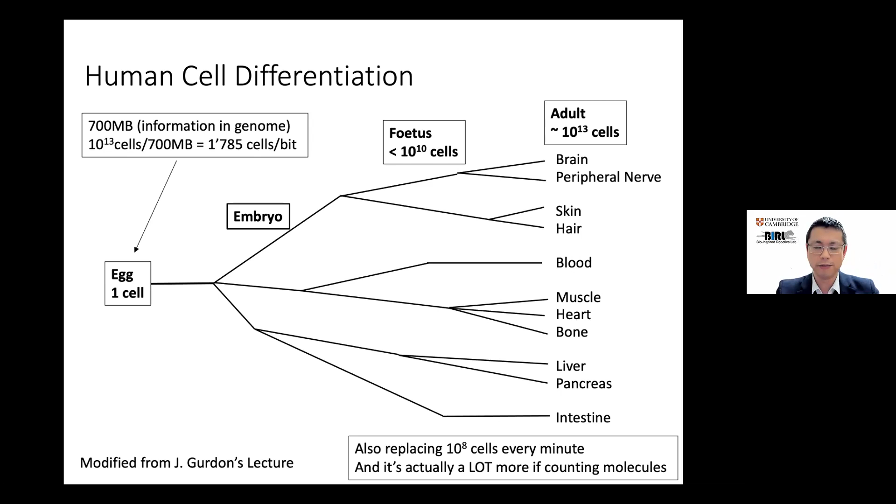Most of our robots are actually very complex. We have thousands of parts and components to make one single humanoid or other complex robot. So those are often more complex than biological features, and they can do quite a lot of things compared to little babies that are totally incapable of doing anything until they grow up for a couple of years.

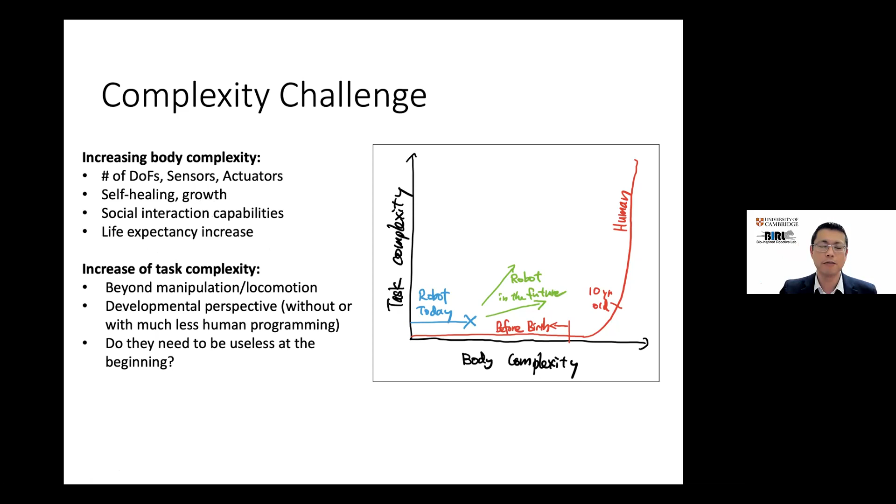Both of these, the challenge of body complexity and task complexity, we need to think about in the long run. So what do we learn from biological self-organization? If you look at how we ourselves start with one cell to become adult, compared to our robots today, the scalability and complexity is really, really different.

If we want to reach the level of biological systems, we cannot build robots by hand. We cannot design piece by piece and assemble piece by piece; we need some sort of automated self-organization process so that the robots can actually assemble themselves and grow themselves. And also the growth has to come with precision and robustness, because this is a really scalable system—we need to think about 10 to the 13 scales of growth rather than just a couple of times bigger.

Diversity is another thing. Morphological dynamics and mechanical diversity is incredible—we have sensors, motors, computers, energy sources, all of these things that have to be implemented at the material level rather than as artificial components. That's something we need to think about.

Moreover, the environment plays an important role. It's not just the systems we have to build, but we need to think about how the system grows, the environment in which the system grows. That's key information, a key component of the growth process—the environment is part of the program for how we grow and learn things. That's what we learn from nature.

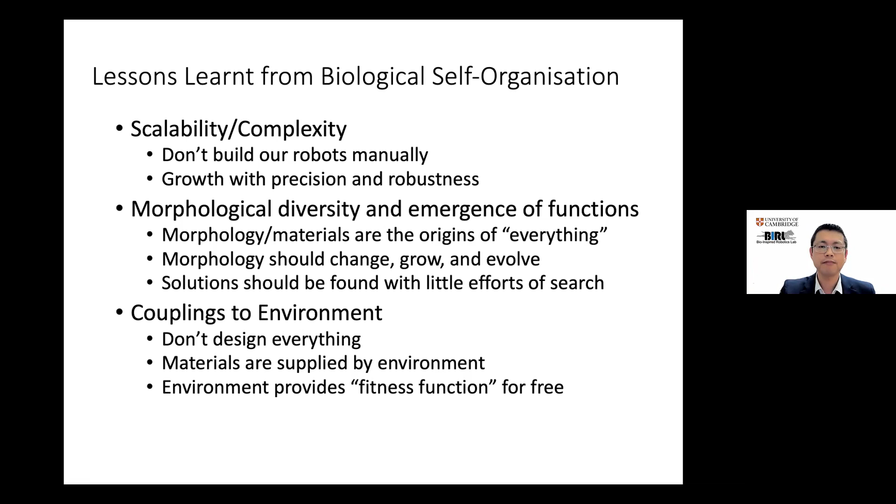Okay, so let's look at how biology actually works. One of the topics we're really interested in is how our body actually grows inside our mother's womb.

Especially at the early stage of our life, the brain and the body are completely different structures, completely different architecture. But then they have to grow together so that they can work together hand in hand. That's the process we usually don't understand as engineers or robotics designers. We usually build body and brain separately and try to put them together afterwards, but that's not actually the case in the biological system.

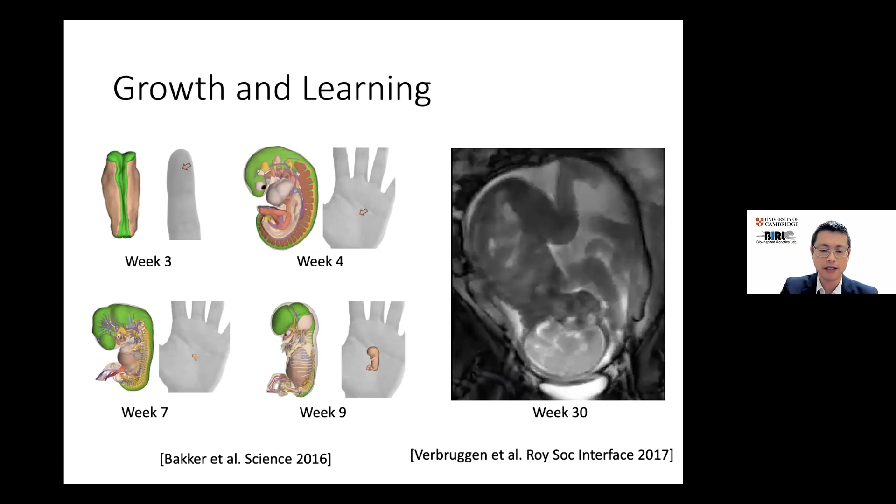One of the first problems we worked on is the problem of so-called reflex behaviors in human motor control. If you look at our body, the motion is triggered by muscle activities. But muscle activities are usually not directly triggered by our central brain — most of the signals are actually coming from our backbone, the spinal cord.

The spinal cord has many neural circuits, and there's a lot of close communication between muscles and spinal cord. Usually biologists or neuroscientists treat this spinal cord neural circuitry as hardwired circuits, because you cannot really control, change, or learn this, especially when you grow older.

But actually this has to also grow when we're really young, especially before birth. So what we're interested in is how we can think of this kind of spinal circuit growth during our developmental process, especially before birth. This is particularly important because most of our daily behavior primitives — such as myotatic reflex, reciprocal inhibition, or withdrawal reflex — all these basic circuits are already there when we're born.

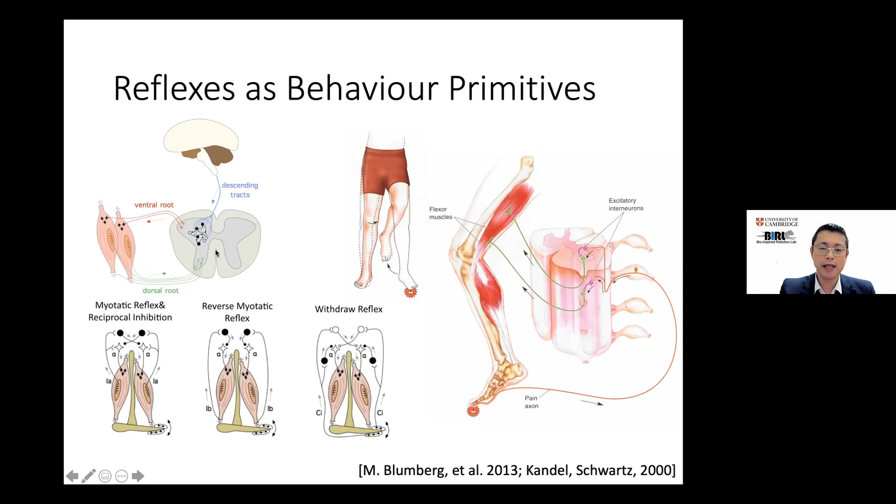We were lucky to work with Mark Blumberg from the University of Iowa in the United States, an expert in spinal cord reflexes. We worked together on how we can prove the hypothesis called the muscle twitches hypothesis.

The problem we're looking at is how muscle activity is related to the activity of lots of neurons. From the central brain's point of view, we don't really know which neurons are connected to which muscles, and we can actually do a lot of different kinds of control through the fully connected neural network, but somehow we need to figure out this connection.

Our hypothesis here is about how muscle twitches play a role. When we're sleeping, or even awake, our muscles are randomly activated from time to time, and these twitch activities are more active during sleeping or before birth. Even the fetus before birth shows this behavior of muscle twitches, and we're trying to figure out whether this kind of muscle twitching plays a role in developing early-stage motor control.

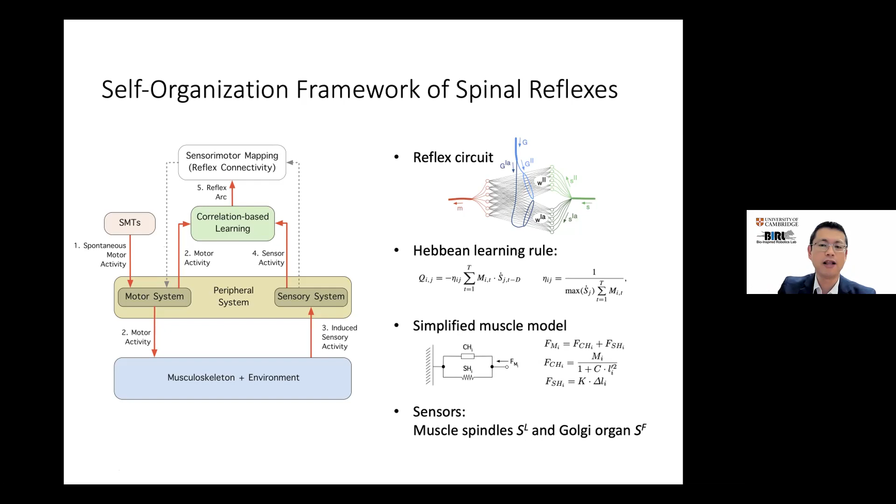And obviously, the most important thing is the spontaneous motor activity. So this is a muscle twitch model that we feed into the motor system and see how the correlation-based learning can pick up some relationship between sensory information and motor information. In this way, we can actually do a systematic understanding of how sensor motor coordination as well as muscle twitches are related to each other.

So what we did is a very simple system. We think of the simplest robot ever, right? We can think of a single arm connected to one pin joint. This pendulum can go right and left in a passive way. But then we think of a simple motor as a muscle.

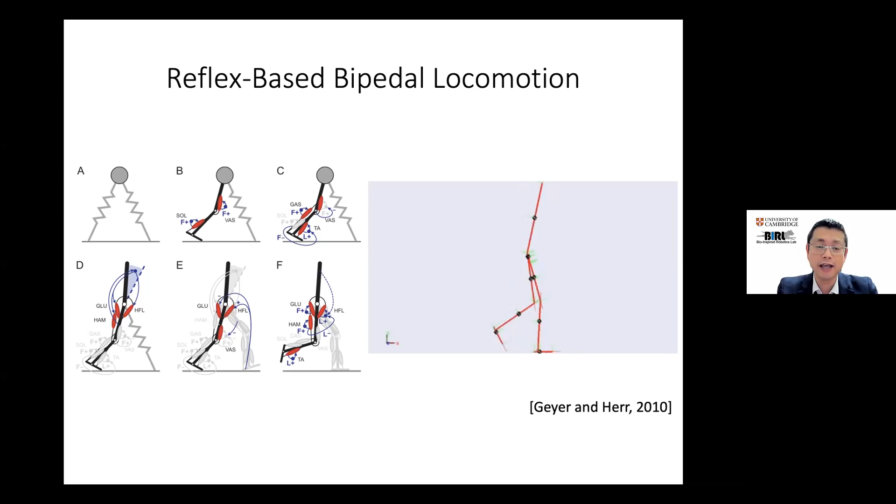And this is something we can start investigating because of this computational capacity in neural networks and so on and so forth.

Okay, so far so good. We talked about the simulation of complex motion control, sensorimotor control. But that's kind of the starting point of our research - how we can deal with the complexity of motor control at the spinal cord level.

But if we work on the mechanical part of it, the mechanical growth is a real challenge from bio-inspired robotics. So we've also been looking at how we can make our mechanical design of robots more dynamic. We need to think of some sort of mechanical growth or mechanical evolution of our robotic system.

That's why we started thinking about the concept of a robot genome. The robot genome is basically a sequence of information that can be translated into physical robots through the phenotyping process. Once we have a robot, we need some sort of selection or reproduction process so that we can update the genome for the dynamic evolution of the body.

So this kind of loop is a real holy grail, so to speak, for bio-inspired robotics, and that's what we've been thinking about - how we can actually do such a thing.

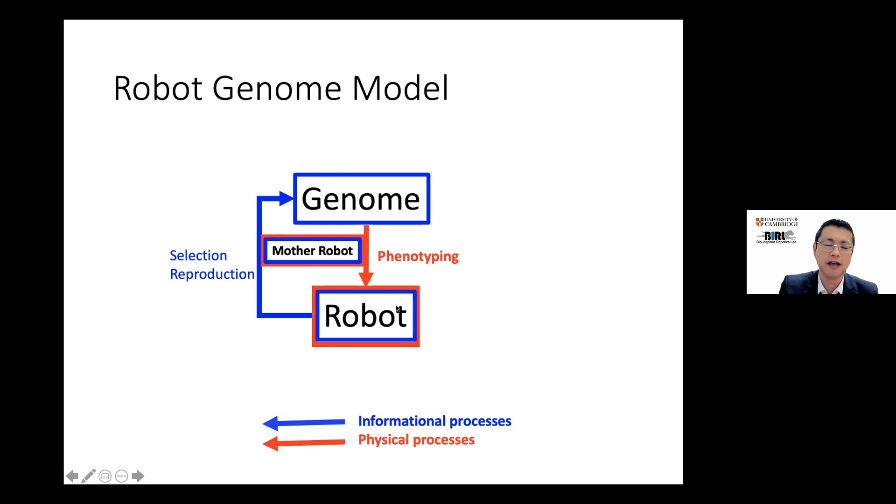So a significant amount of time of our research has been invested to build the mother, or what we call the mother robot. The mother robot is a robot system that can actually interface between the information world and the physical robots. And that's what I want to introduce you to in the next few minutes.

The breakthrough of this mother robot research was really about what kind of materials are available. We are really lucky that we found this interesting material, the hot melt adhesive - this is nothing more than hot glue. I think you have it in your home, you can buy it in any DIY shop. But this material is incredible in the sense that it's very well engineered. We can control the material properties - the Young's modulus, the softness, rigidity - very well, depending on the temperature. And we can also control the adhesiveness and so on.

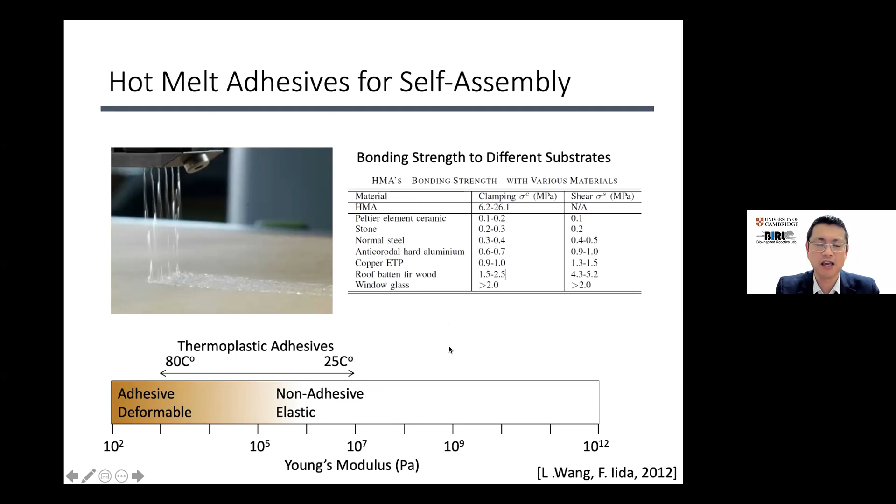We can actually glue almost any materials, from stone to plastic to metals and so on, as long as it's not wet.

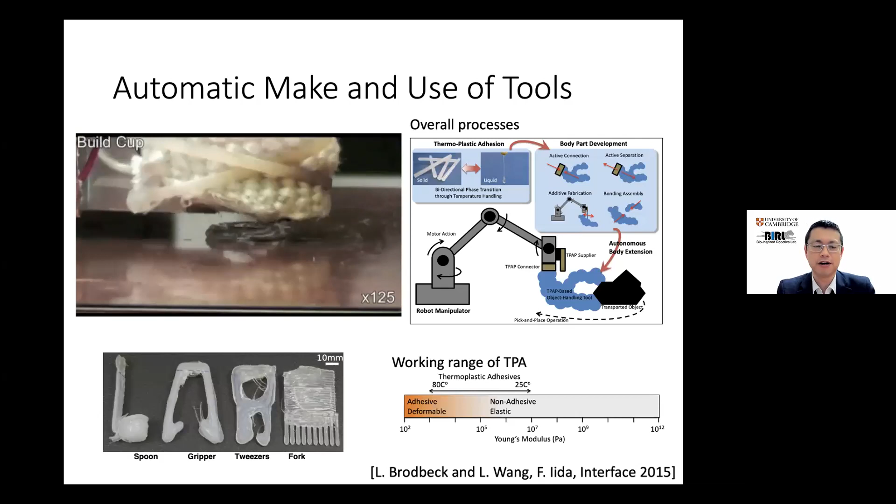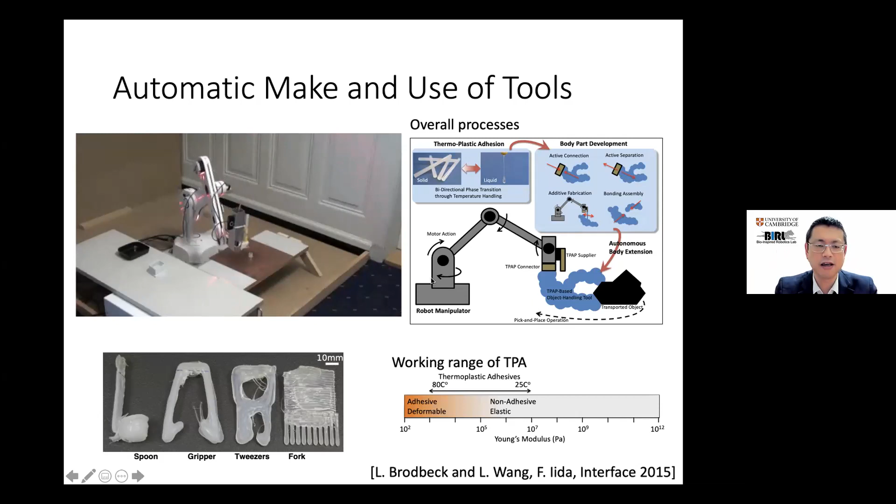This is an interesting material that we started thinking about for mother robot research. The first thing we did was 3D printing with this material. This is the hot glue, hot melt adhesive, put in a specialized end effector robot manipulator. This robot is able to do 3D printing of structures.

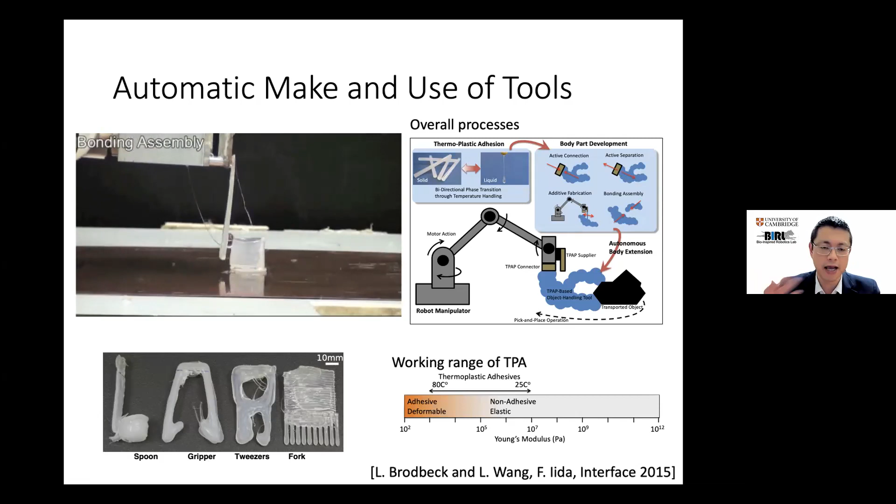It's not only 3D printed, but you can use this material as a glue. So 3D printed structures can be put together into complex mechanical structures by gluing them. This robot can do construction of many different kinds of structures by 3D printing and gluing.

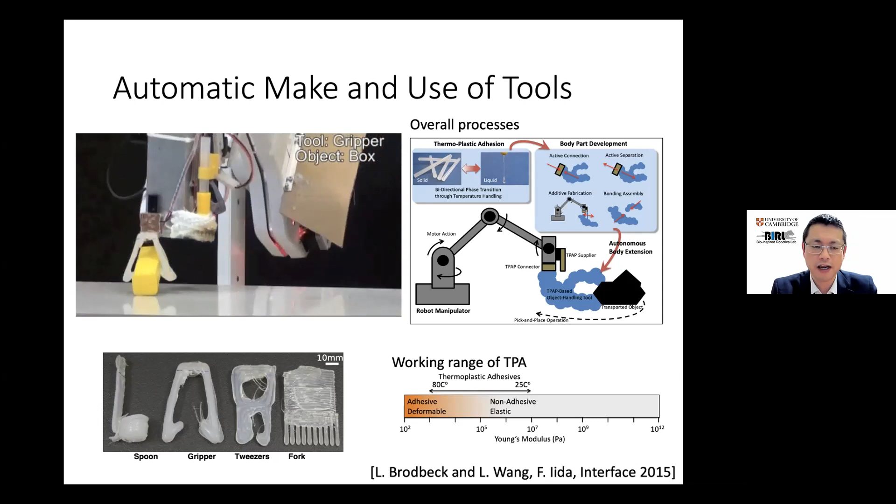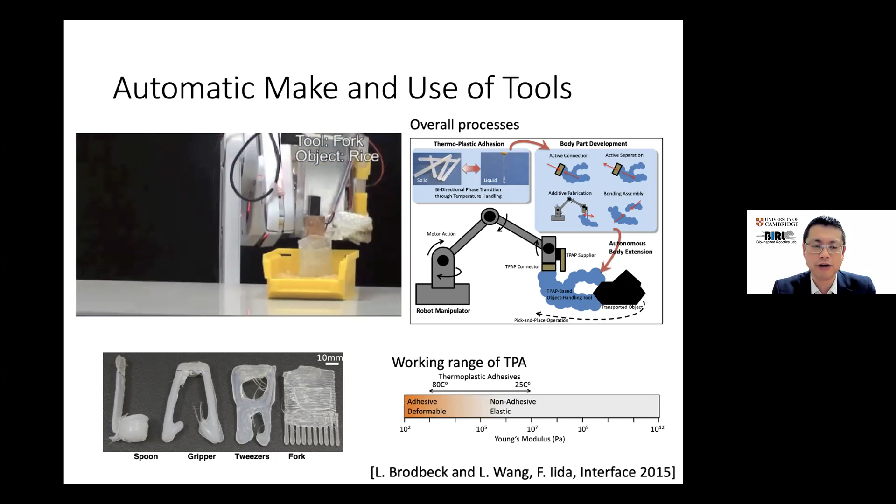This is a demonstration that the robot can automatically change its own end effector for different kinds of tasks, such as scooping water, picking up pebbles, picking up a large object, and so on. This demonstrates how hot melt adhesive material can be used for dynamic change of the mechanical structure of robots.

That's the starting point of our research. This is the first demonstration we did. But of course, the design of this end effector was given by human beings. Even though the building process and exchange process of mechanical components are done automatically, the design itself was given by humans.

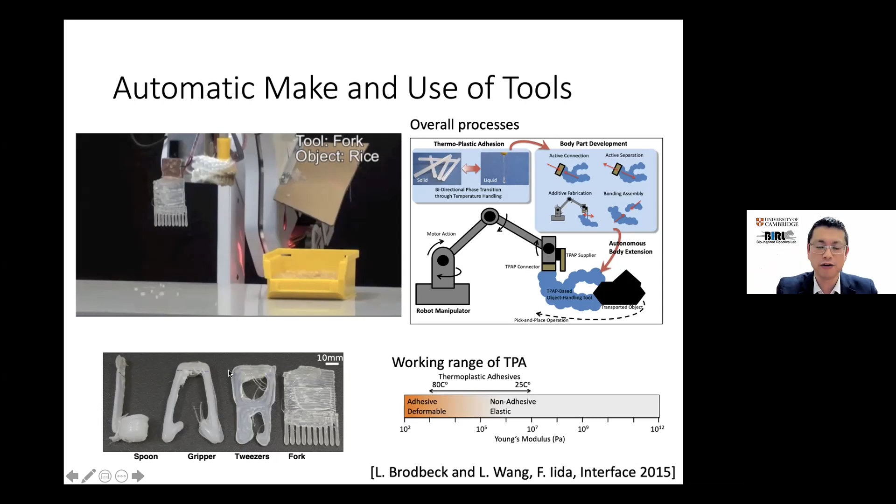So the next challenge is how the robot can design its own body automatically, without human intervention. That's the idea of physical robot evolution using a mother robot.

This is the next version of mother robots, which has the glue end effector but also a gripper that can pick and place different components. This robot is able to assemble a large diversity of structures by assembling a few components and gluing them together.

In this case, the mother robot is making a small child robot. This mother robot can make different kinds of child robots so you can explore the design space in a trial and error manner. Here, the challenge is how we can define the genome.

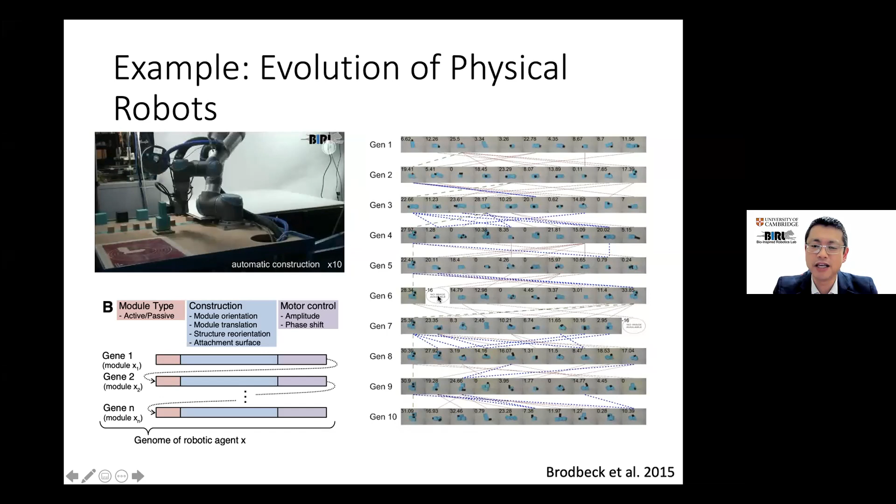That's a very good point. So if you look at all these pictures, there's some missing picture over here, for example. This is the failure of the building process. Some processes are more difficult to build than others, and in that case it's likely to fail. So this kind of failure of building process should be negatively reinforced, and therefore this robot is automatically kicked out from the evolutionary process.

Yeah, thank you so much. Yeah, this is really, really cool. Thank you. Thank you. Right. So this is really exciting research.

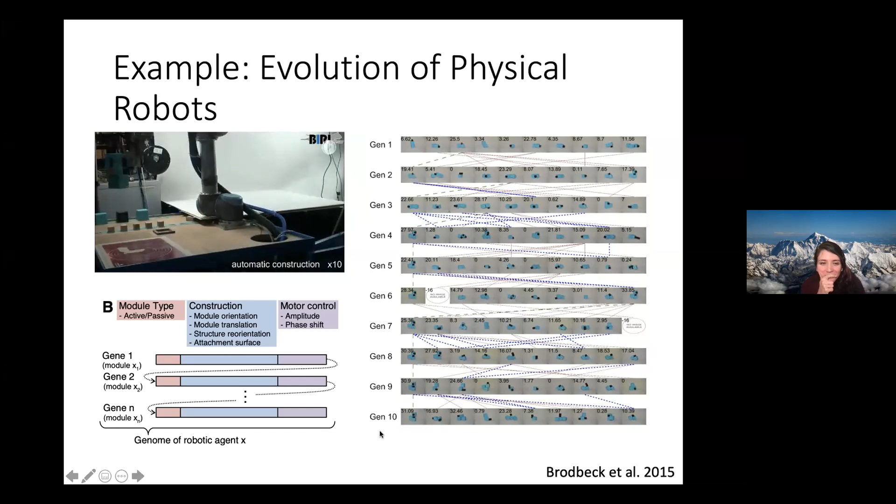One of the most exciting things is what kind of things come out from the evolution process. These are some of the coolest robots we found from evolutionary search. Sometimes we have very small robots like this - smaller robots are easier to build and unlikely to fail, so there are lots of robots like this in evolution. But on the other hand, bigger robots are more difficult to build, but can move faster and over longer distances. So this is the trade-off between small robots versus large robots.

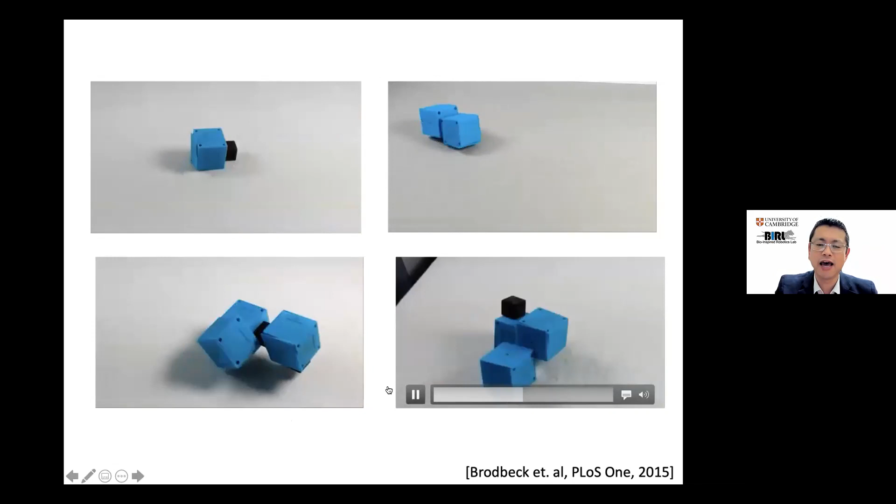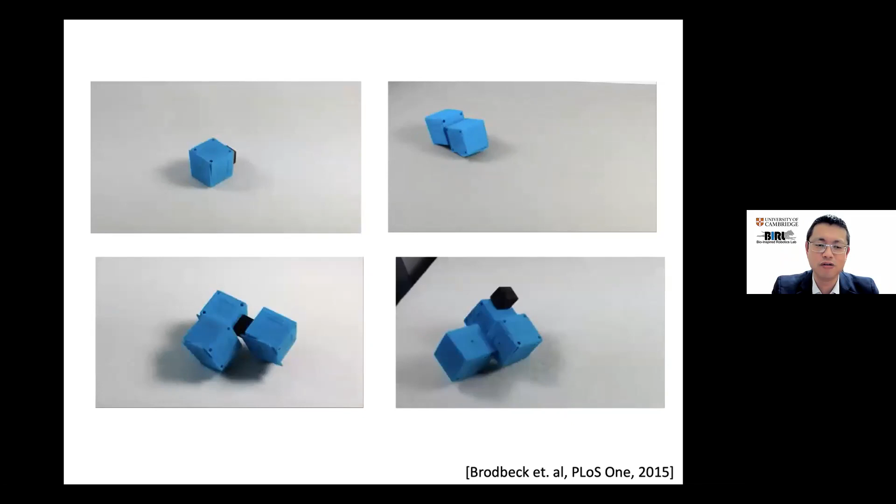And all of these kinds of things can be automatically generated by the evolutionary process. The human is not involved in the design process, and that's why it's really interesting. All we need to do is provide these cubes and the genetic structure, but then everything else is automated.

The largest experiment we did involved 500 robots automatically generated over 4 weeks. Two students were running this day and night. The only thing not really automated is the cleanup of failure cases - when the mother robot fails to build, a human has to help disassemble or clean up the mess, and that has to be done manually. But otherwise everything else is automated. This is kind of an automated research project.

We usually observe some form of fitness increase because this is selection of the fittest. This is kind of an obvious result, but sometimes there's a higher rate of improvement, other times it doesn't change much - but you usually see some steady increase of the fitness function. But the most interesting thing from this experiment is that some of the outcome behaviors are very unpredictable and difficult for humans to design.

Most of the robots actually show periodic behavior like this. We have some shuffle behavior, very periodic, one step after another. This one is rotating around but still moving forward. So this is all kind of periodic.

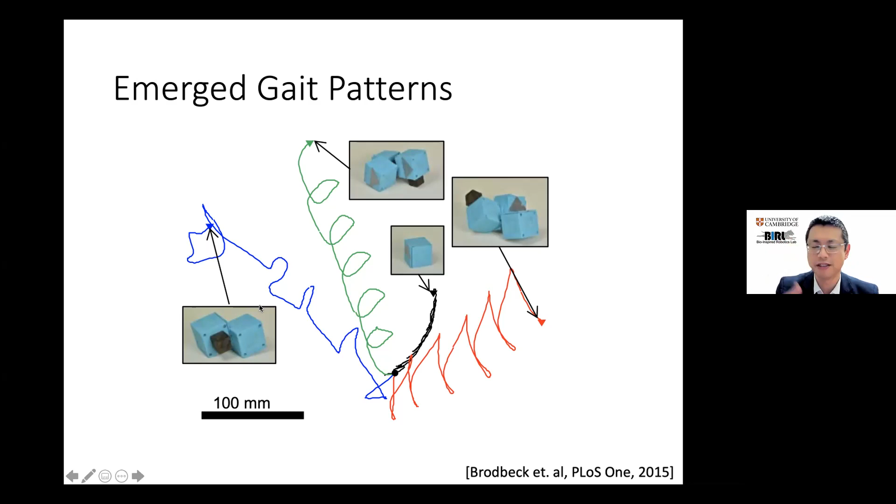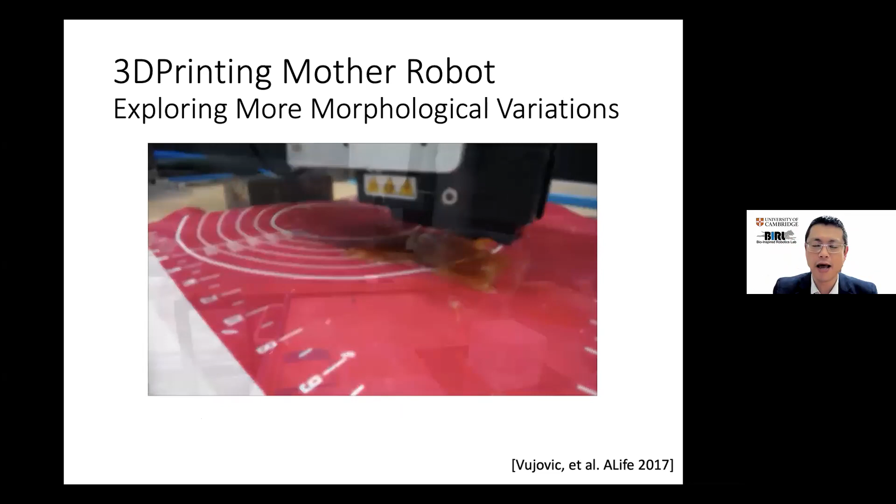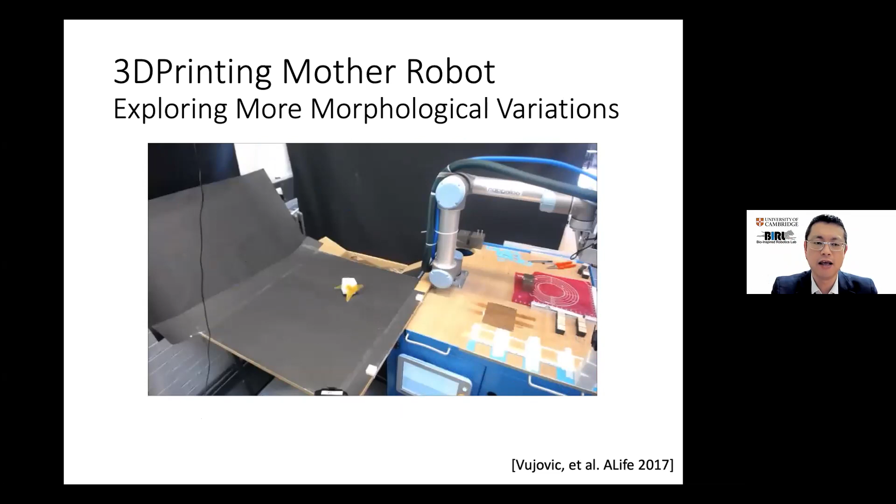So this is the kind of research we've been doing, started about 10 years ago, with many different approaches. This is an introduction of the 3D printing process in locomotion behavior - basically the same research on evolution of locomotion robots, but integrating soft materials for 3D printing.

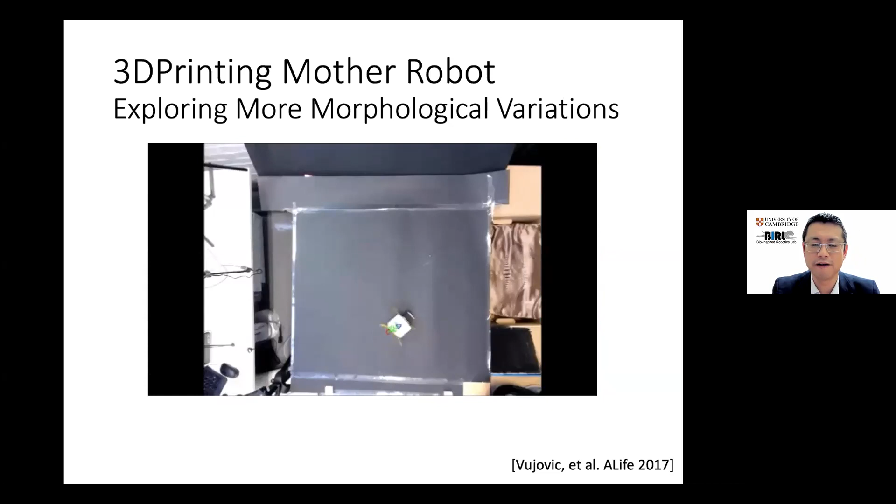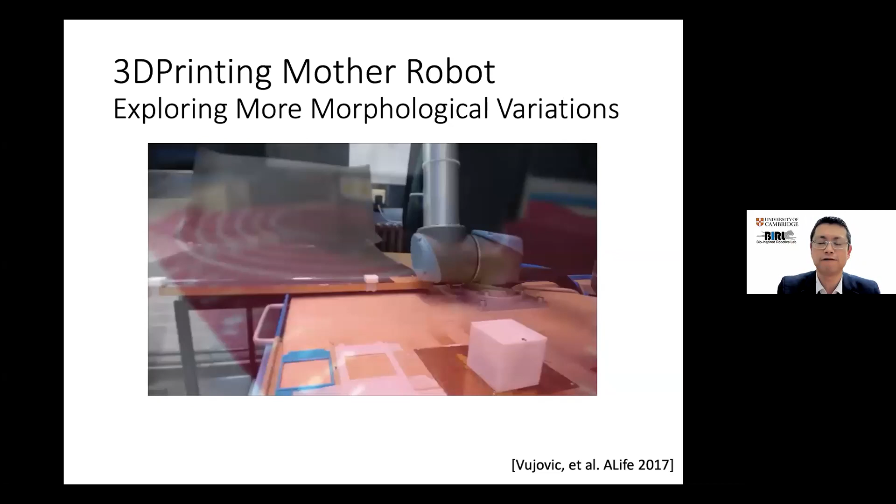And again, it's quite interesting - there are so many different ways. This is a very simple robot with only one motor, but the soft deformable material can interact with the environment in many different ways. That's why it has so many different ways of moving forward. This is the kind of research we've been doing for the last 10 years or so.

So this is a kind of introduction to our physical evolutionary robotics, and this is a really exciting research area where robots can actually build something. A robot can be creative, building something different every time rather than repeating the same thing over and over again. So that's a new way of doing robotics from now on.

But one of the real challenges for the next step is how we can achieve robot intelligence at the material level. That's why soft robotics has been the playground for our research in the last 10 years, because we can introduce so many different kinds of materials for diversity of robots. So far, all the evolved robots have been very similar, but the diversity comes from material variation. We've been doing a lot of material-level research because soft deformation is the origin of all embodied intelligence.

Looking at muscles, heart, lungs, lens, skin, whiskers - all of these things originate in the deformation of soft materials. There are lots of soft functional materials available for soft actuators, soft sensors, soft electronics, soft computers, and soft batteries. We can do evolution of all this functionality, including batteries and computers, using soft materials, and that's going to be the breakthrough for physical evolutionary robotics.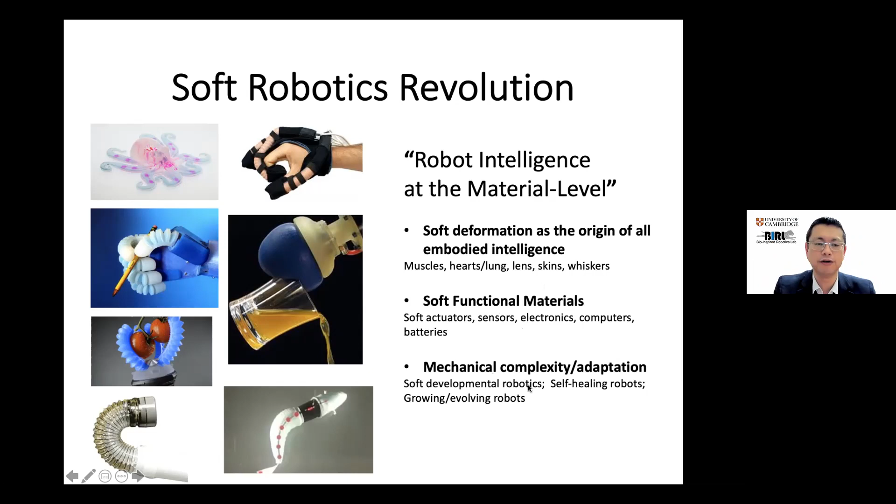On top of that, we can do complex adaptation based on soft materials, and that's what we've been interested in. So there have been lots of innovations in the last 10 years, from very application-oriented medical devices, to drones, deformable drones, wearables, sensors, or actuators. There are many different kinds of research going on in this area.

But in the end, what we're really interested in is how we can make our materials more intelligent. Material design is one of the next big research challenges we're interested in. So one of the things we're doing is deformable materials - some sort of soft elastomer, it can be silicone, natural rubber, or other soft deformable materials, mixed with functional materials like electrically conductive compounds, put together to make functional deformable materials.

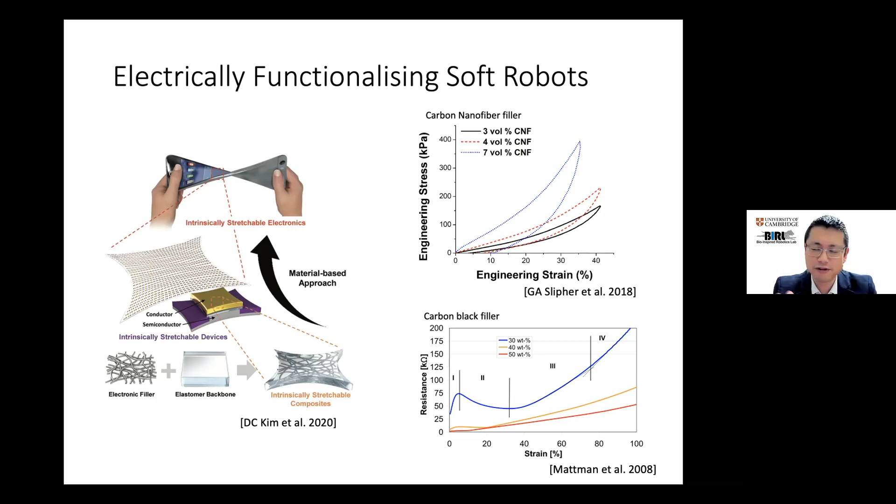Then we can make a deformable sensor, deformable computers, and all that kind of thing. This is really complicated material science research - we're not doing too much materials research ourselves, but I think some of the results are really exciting.

One of our recent achievements is a self-healing conductive elastomer. It's electrically conductive, it can be 3D printed, and it can self-heal.

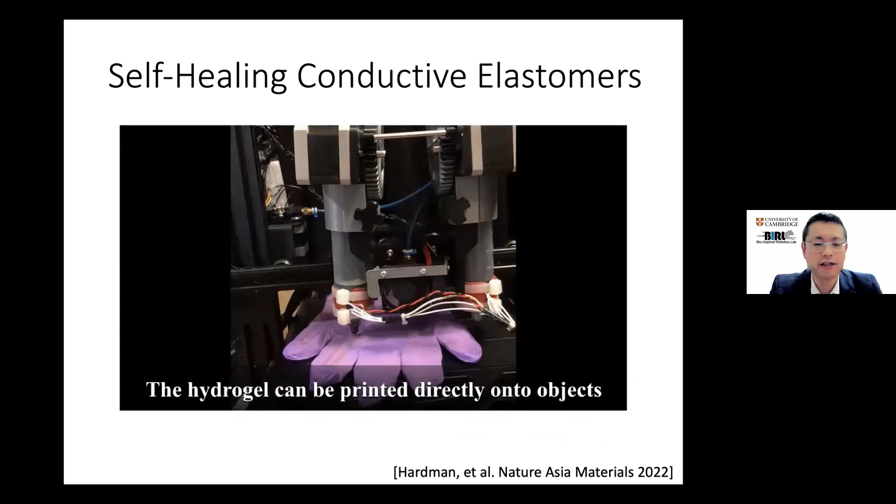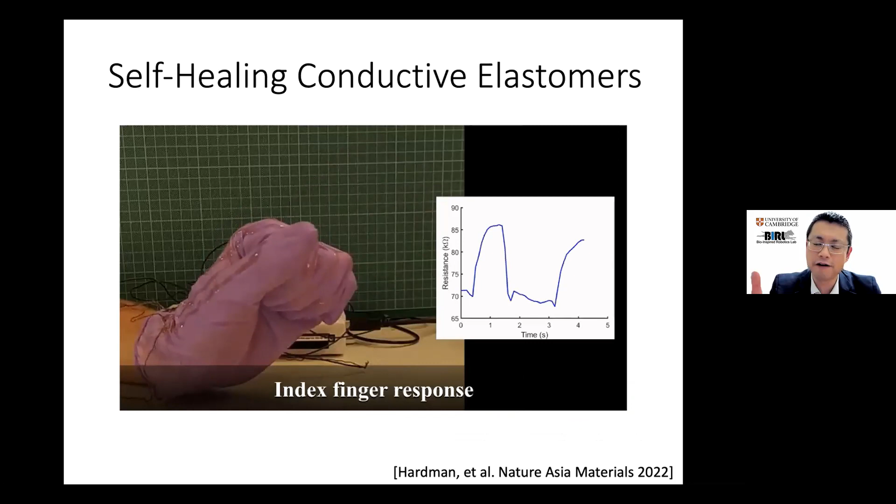So here is the 3D printer that we made out of these materials. We can put many different shapes of sensors onto the glove, and we can measure the deformation by wiring them up and hooking them to converter devices.

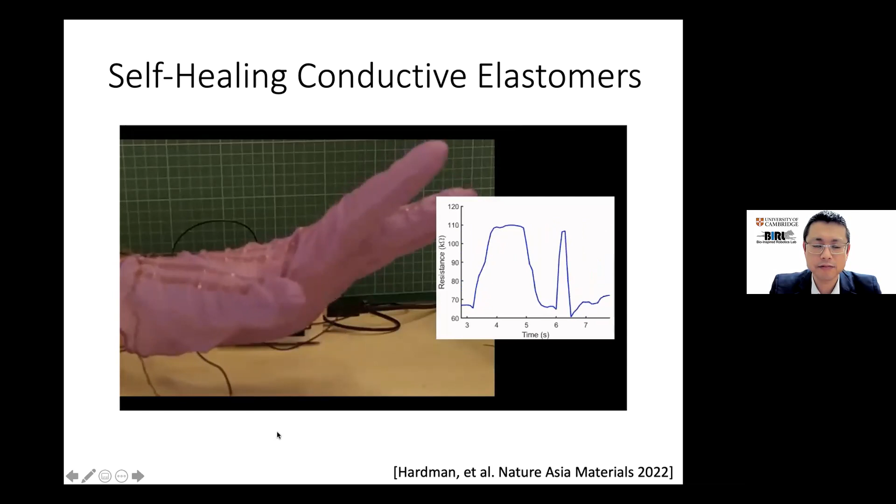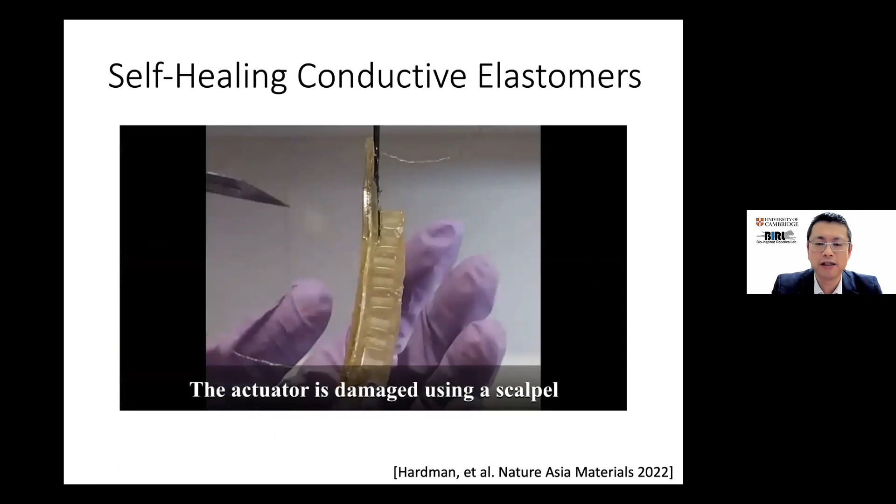One of the interesting things is that 3D printing allows us to make all different kinds of structures. So this is a pneumatic actuator - we 3D print this kind of structure, give it air, and then it can move.

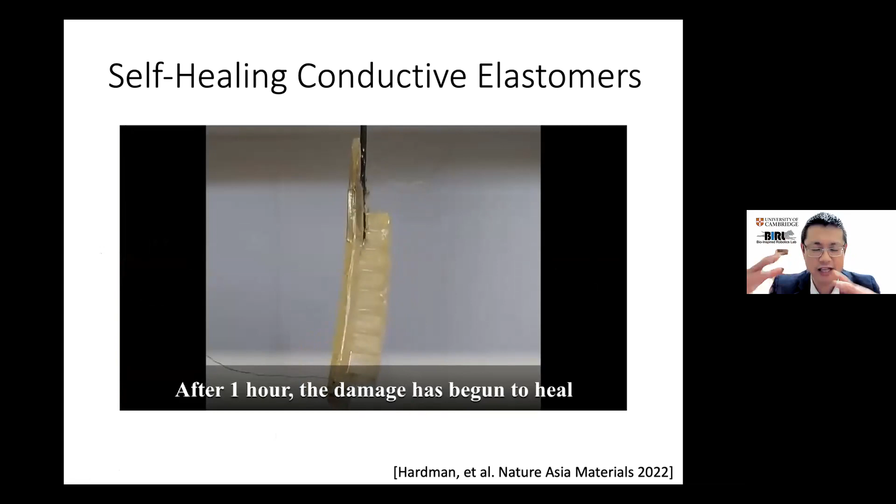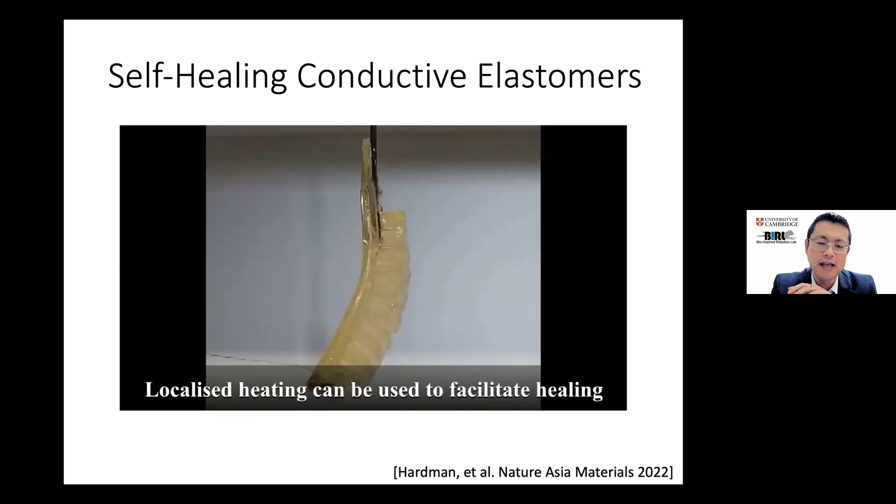Now this material is self-healing, so we can actually cut through this actuator so that it leaks air and doesn't work as an actuator. But because this is self-healing material, it can automatically recover from the damage, allowing the system to do not only sensing, but also actuating, and also self-healing. So many different functions can be put together into a mechanical structure.

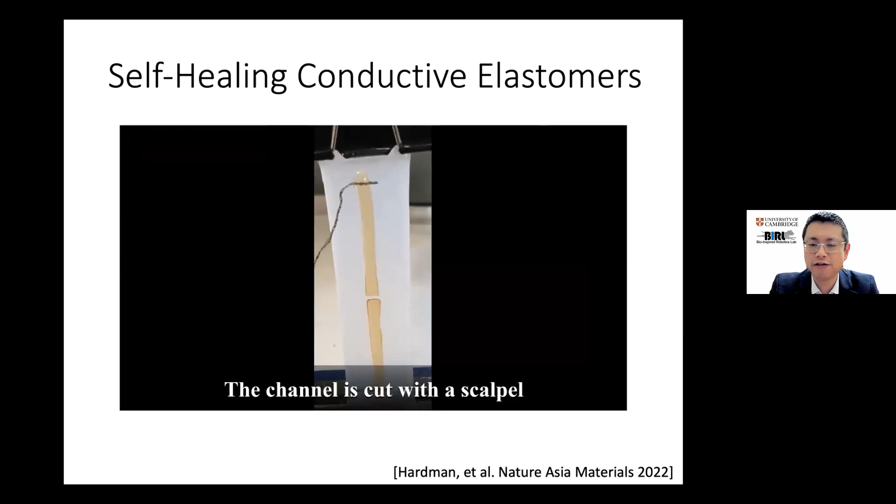All of these things are kind of manually built, but we can see how this kind of material can be used for 3D printing, as well as functionalizing through electrical signals. This can be neurons, or tactile sensors, or some sort of mechanical structures, and we can use this for many different kinds of things.

We've been doing many different things. One of the challenges is that all these materials can be put in high density, so we can put so many together. In this case, we're making a human finger-like structure in the robotic arm, and this finger structure can contain a lot of sensors inside. Each black line here is the conductive material, and you can use this as a sensor.

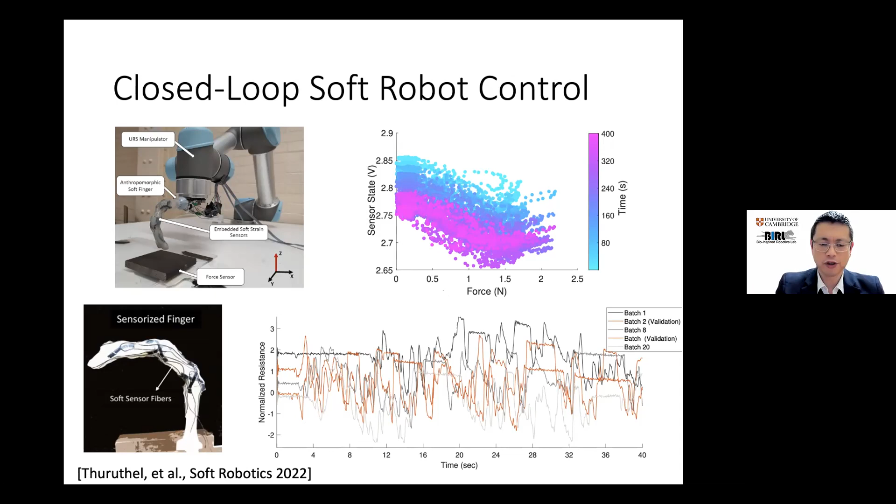But the challenge is that if you have so many of them in a soft deformable structure, the electrical signals become messy and complicated, with lots of drift and noise in the system. So it's usually difficult to program this kind of thing, but luckily we have AI techniques.

LSTM network, a recurrent neural network technology, can pick up temporal information to learn complex interaction between input and output. We can train a neural network to achieve good force control of this kind of soft robot.

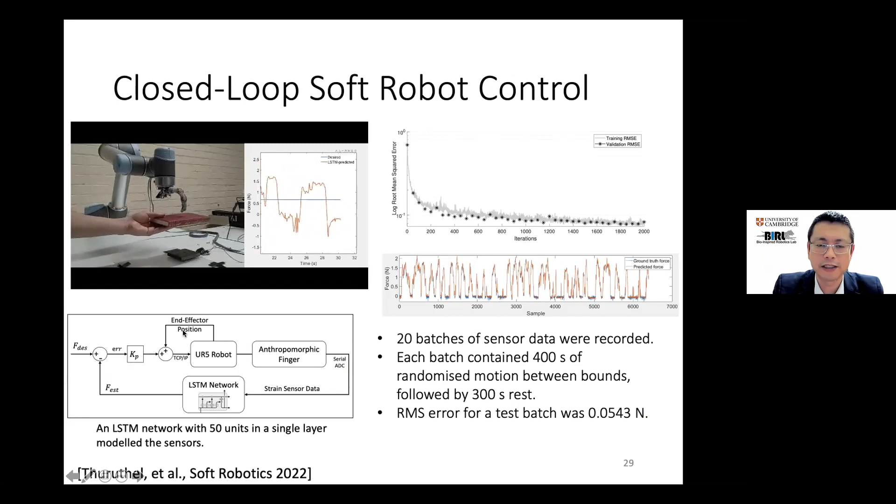And also the 3D printing is a really interesting challenge, how we can combine different materials. In this case, we tried to use rigid materials and soft materials together so that it can work just like our hands. Our hand has an anisotropic deformation profile - some direction it's soft, some direction it's not.

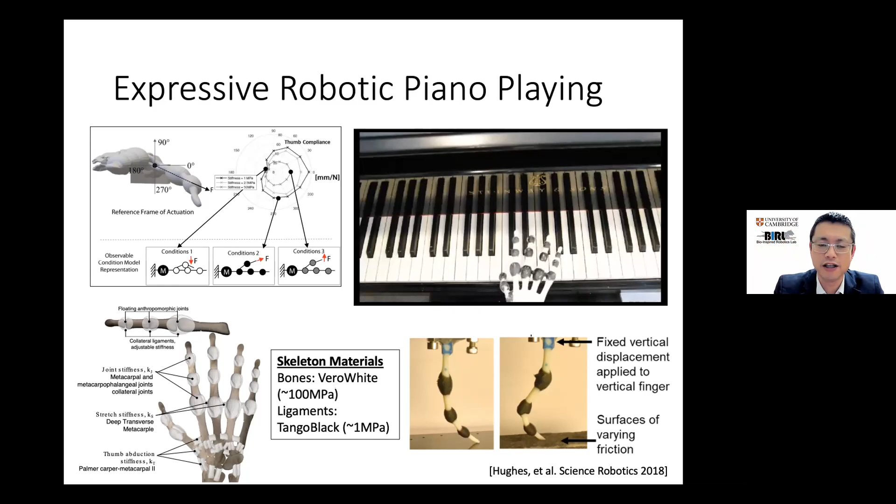This kind of design is the next challenge. We can use AI to design complex structures like this.

Okay, so I think I just want to leave some time for discussions. I just want to conclude my presentation. What we are really interested in is embodied intelligence.

So embodied intelligence, we understood, is how we can build a physical system that can interact with the environment in interesting ways. We have a very complex body morphology, sensor and motor system, and that has a lot of complexity that interacts with the task environment. But this kind of physical interaction with the environment is really the rich foundation for the brain to grow over time. If you don't have a complex, interesting body, an interesting brain cannot evolve, and that's our foundational idea of embodied intelligence.

And that's why we started doing soft robotics, because this is the only way we can make a complex morphology, complex body dynamics like biological systems. And that's the starting point of our research.

But then we are really at an interesting timing in history, that we also have AI machine learning techniques available for our research. So how we can put this AI machine learning technology on top of a complex body in order to make our robots more biologically plausible, or more intelligent like biological systems. This way, we can actually make our robots hopefully reach the next level.